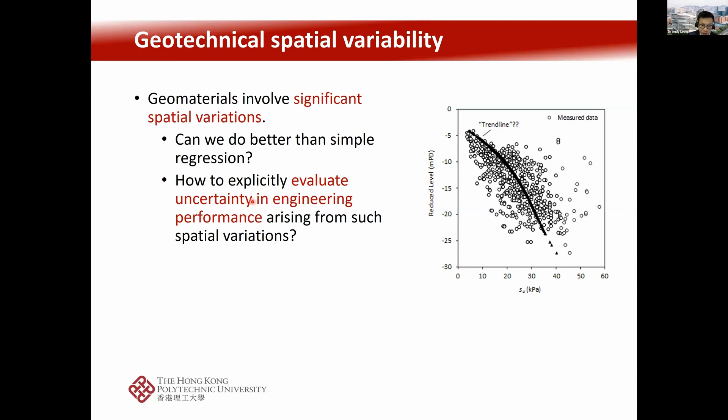So the question is, can we do something better? Can we use a more quantitative approach to consider all this variability and how that might affect our uncertainty in engineering performance? So here we go back to some basics in statistics. If you have a data set, it's very simple to calculate the mean value of those data points and also the standard deviation.

Two pages ago, we talked about this parameter called COV. COV in full is called coefficient of variation. It's basically just the standard deviation divided by the mean value. In other words, it tells us the amount of dispersion in the data set when compared with the mean value of the data set.

So if we go back two pages, for properties such as undrained shear strength, the COV, the dispersion, can be roughly 20 to 30% compared with the mean value of the shear strength. For friction angle, you can also have something like 10% to 20% COV, which again is just standard deviation divided by the mean value. So there's a lot of dispersion in geotechnical materials.

If you are familiar with structural materials, concrete and steel, for example, usually their properties might be associated with a COV of roughly 10% or less. Whereas for soil properties, this COV could be 20, 30, 40% quite easily, much, much more variable in geotechnical materials.

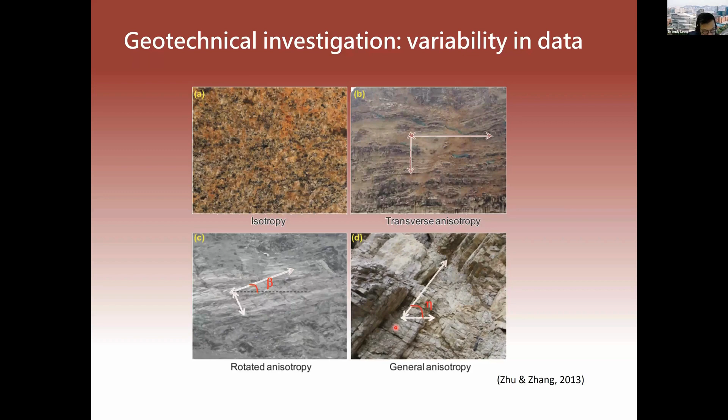So here are just some photos, to remind us again how variable geomaterials, soils and rocks, can be. You can easily tell that these materials are quite non-uniform, or heterogeneous, if you like. And in fact, over the years, the Geotechnical Engineering Office, or GEO of CEDD, has compiled a good amount of data from different parts of Hong Kong.

GEO, for example, manages a lot of slope projects across Hong Kong, and there are a good number of GI fieldwork reports and laboratory test reports. They have recently compiled all this into a digital platform, which they call the DGIU, Digital Geotechnical Information Unit, a web-based platform for engineers to easily extract data from different parts of our city.

And most of you already know that in Hong Kong, the level of geotechnical control is very good. When it comes to GI, drilling, coring samples, or obtaining block samples of the soil, we have a very good standard, GeoGuide 2 or GeoSpec 3, which tell engineers the best practice in retrieving soil samples and conducting laboratory tests on those samples.

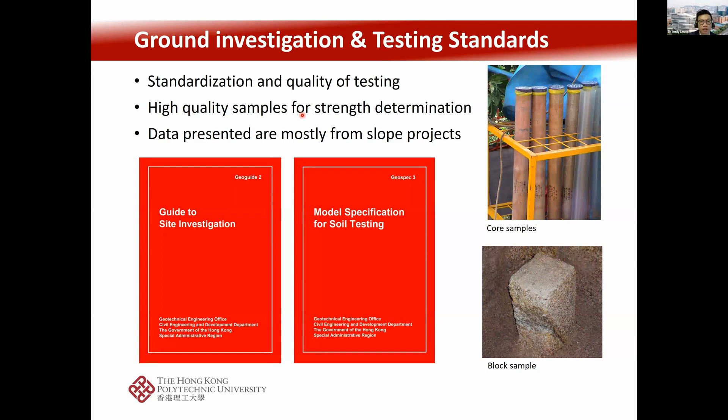So from all these data sets across Hong Kong, we have got high quality samples and also high quality laboratory test results to help us characterize the material properties, or more importantly, the variability of material properties across Hong Kong. So let's take a quick look at the distribution.

So this pie chart here basically tells us the number of data sets that GEO already compiled for different types of soils in Hong Kong. So we have a good database for fill material, a colluvium database with more than 800 data points, CDG 750, CDV 650, and so on. And these numbers here actually indicate the numbers of multi-stage consolidated undrained triaxial compression test data.

So when I say 750, that basically means we have got for CDG 750 combinations of cohesion and friction angle, which are based on the triaxial test results across different parts of Hong Kong. So today we probably will focus more on this CDG database because we've done some work using this quite comprehensive set of information.

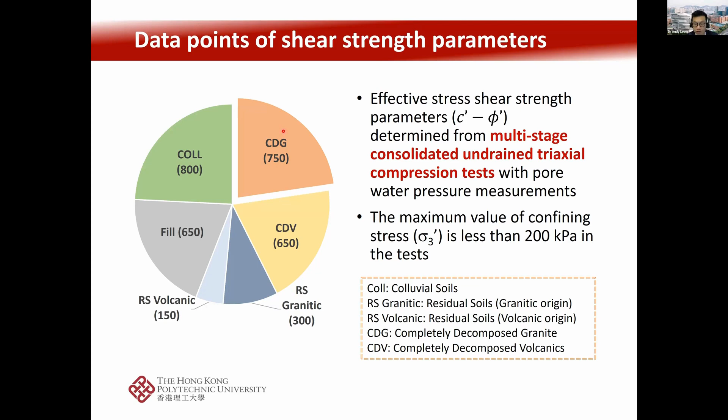Okay, so of course, if you have got 750 samples, c, phi, and so on, it becomes very straightforward for us to plot those data, calculate the mean value, standard deviation of cohesion and friction angle, and then figure out the coefficients of variation like we defined before. So just very quickly, for different soil types, the mean values of cohesion may vary from somewhere around 6 kPa to about 12 kPa. And then the standard deviation is roughly 60 to 80% of the mean. Again, that's the definition of COV.

And then similarly for friction angle, the mean values from these large data sets are also listed on this table. And sometimes we might notice that between the two parameters, cohesion and friction angle, there might be some sort of a weak correlation. So all these tables and data sets we published some years ago, like 2 years ago, in collaboration with colleagues in GEO. And of course, you can easily calculate mean and standard deviation from this data set.

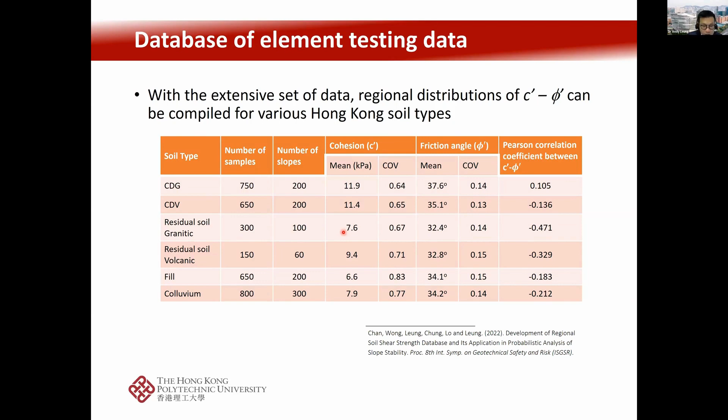You can also very easily plot this up into a histogram. So this one is a histogram of the cohesion values together with the fitted probability density function here. And then we can do a similar thing for friction angle, which looks like a normal distribution. These are the shear strength parameters for the colluvial soils in Hong Kong. And on the right-hand side, of course, you've got CDG.

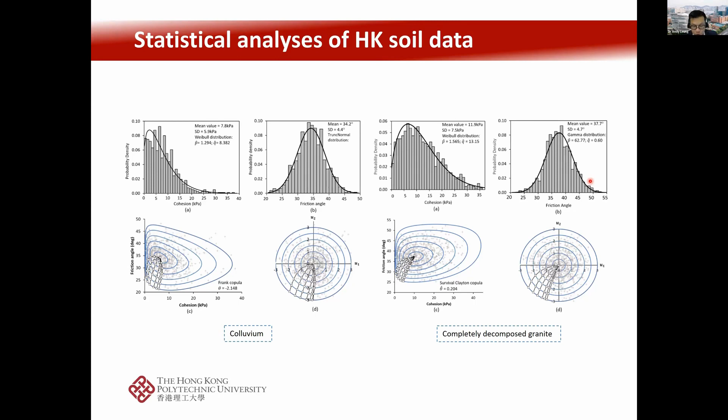Again, you can plot up the histogram and probability density function for the cohesion values and also friction angle based on these extensive sets of triaxial test data. So all these are actually quite straightforward. With these good data sets, it's very easy to do. But now we want to go one step further beyond just cohesion and friction angle.

If you think about the origin of these data sets, they were from slope projects where the main concern is to calculate whether the slope fails or not. It's a slope stability limit equilibrium calculation. So the most important things are, of course, the shear strength parameters, cohesion and friction angle.

But there are also a lot of geotechnical or civil engineering projects where the concern is not just failure or not, not just collapse or safe; the concern could also be the displacements of the ground. In that case, if you want the soil or rock displacement, you can't just rely on shear strength parameters. Everybody will know that at least you need some sort of stiffness, Young's modulus values, to help us calculate displacement.

So that's why we took those data sets, 700 and something sets of triaxial test data. We tried to go into more in-depth analysis to understand the entire stress path and also the stress-strain response, such that we can also determine the stiffness parameters, or more importantly, the probability distribution of the stiffness parameters. So we go into lots of the details of all those sets of multi-stage consolidated undrained triaxial tests.

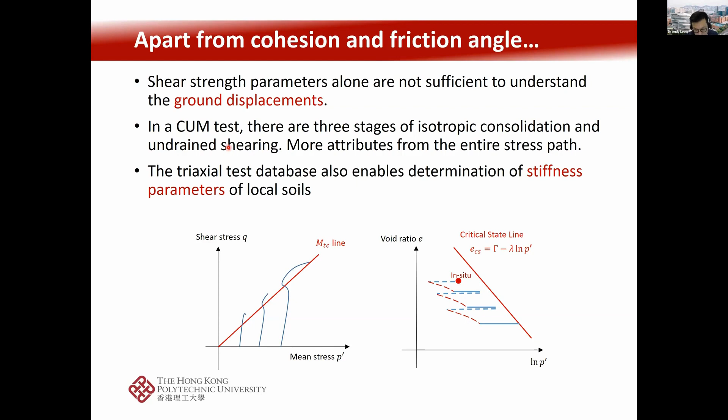And then we also try to look into how well we can simulate those test data using different constitutive models. So first of all, we start with a simple model, which is the familiar Mohr-Coulomb model. Most of you will still remember from school that in the Mohr-Coulomb model, you have the shear strength parameters, and then you also have some stiffness parameters, Young's modulus and Poisson's ratio.

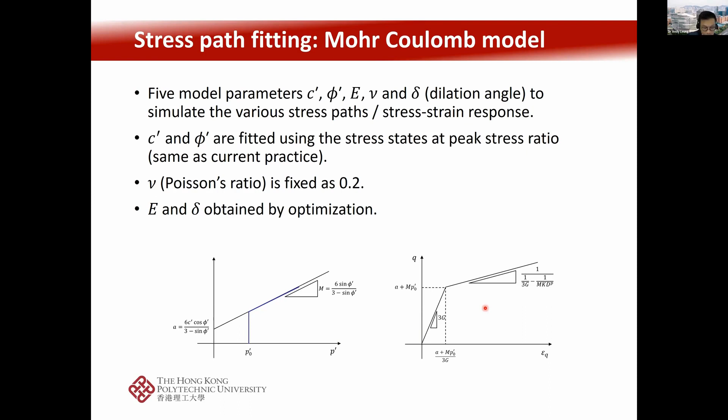So we try to see whether this particular model can match our experimental results well enough. And apart from this simple Mohr-Coulomb bilinear stress-strain model, we also introduced or adopted another more sophisticated model, which is based on critical state soil mechanics. So this model in particular is called the NorSand model, which was proposed by Dr. Jefferies in the UK in 1993.

So I'm not going to go into all these details of yield surfaces and the complicated details of the constitutive model. But then in simple words, this model allows us to understand or to simulate the more nonlinear behavior of the soil stress-strain response. So hopefully we're going to get something like this. We're going to use this model to help us simulate a very highly nonlinear soil behavior. So that's what we want to achieve using this slightly more complicated constitutive model.

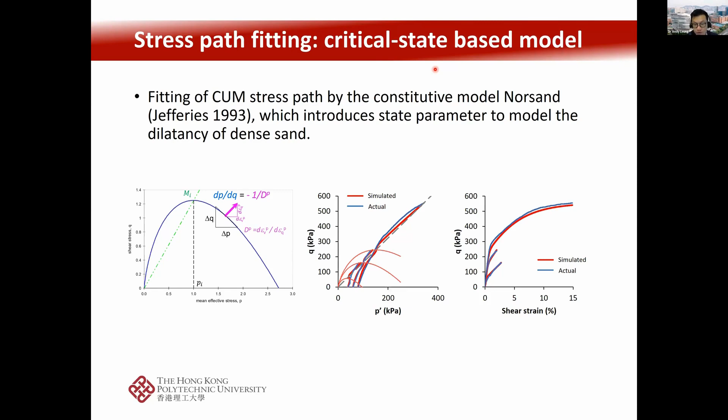So for those of you who might not be very familiar with critical state models, basically this NorSand model includes these model parameters. So if we go back to Mohr-Coulomb, we know that there are basically 4 or 5 parameters: the shear strength parameters and the stiffness parameters. When it comes to the critical state model, NorSand, we have in total 7 parameters. Some of them are related to the shear strength. Some of them are related to the elastic modulus. Some of them are related to the yield behavior, the yield function, yield surface, and so on.

So I'm not going to go into too much detail in terms of these theories. But then the main message here is that we have got a lot of triaxial test data. We want to be able to simulate or calibrate the parameters so that we can predict the entire stress path and also the entire stress-strain response of the realistic soil behavior.

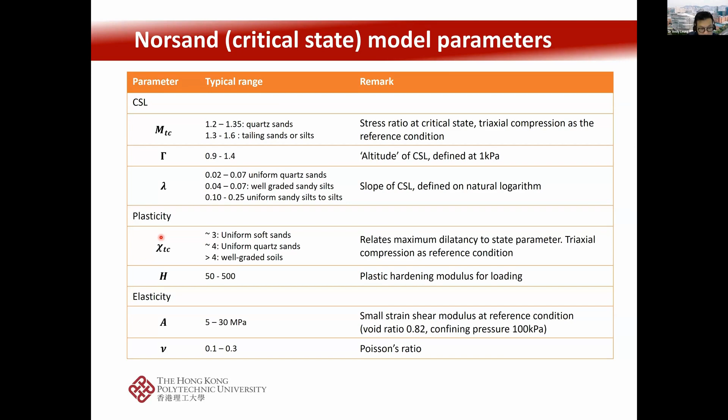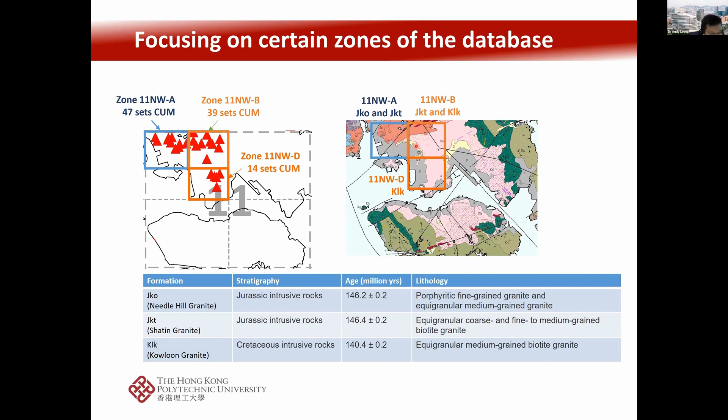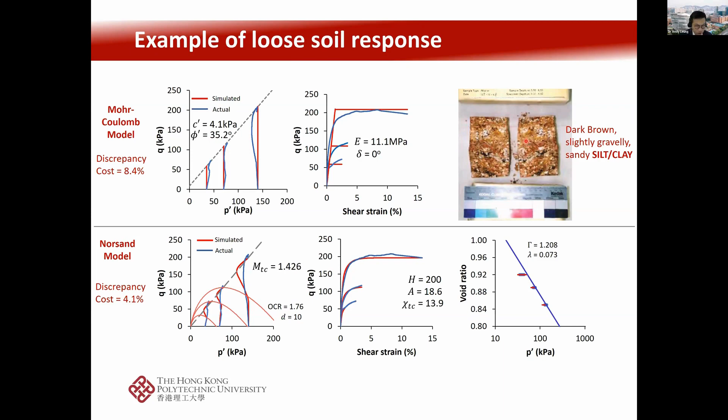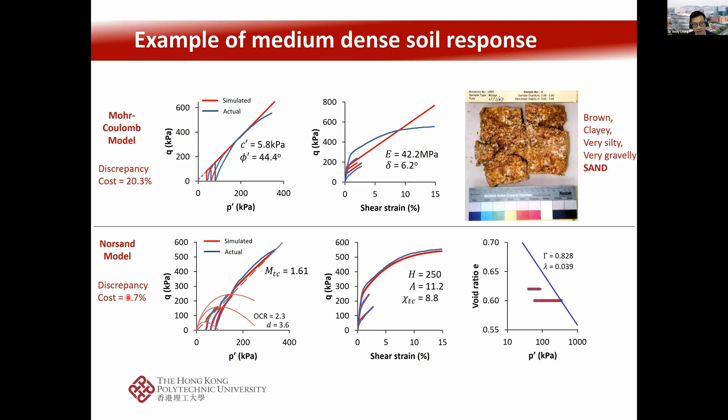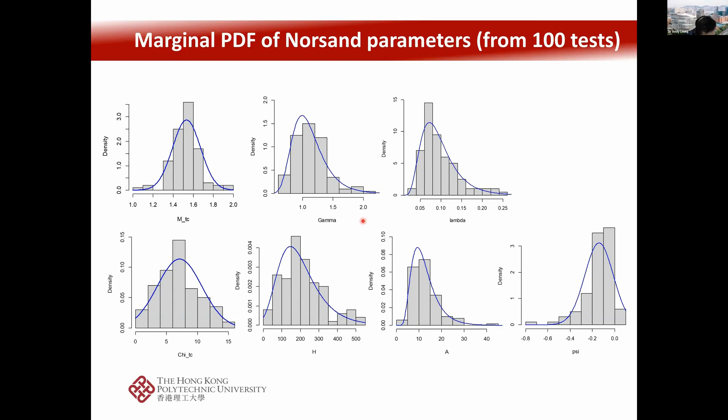And then with that, I'd like to go to the second part of today's presentation, which is how this material variability or material uncertainty will be reflected into the response of the system. So basically, if you have a certain uncertainty in your material property, if you put that uncertainty into your calculation model, which might be your finite elements, finite difference, or other types of calculation model, you will then get to understand or obtain a certain uncertainty in your system response.

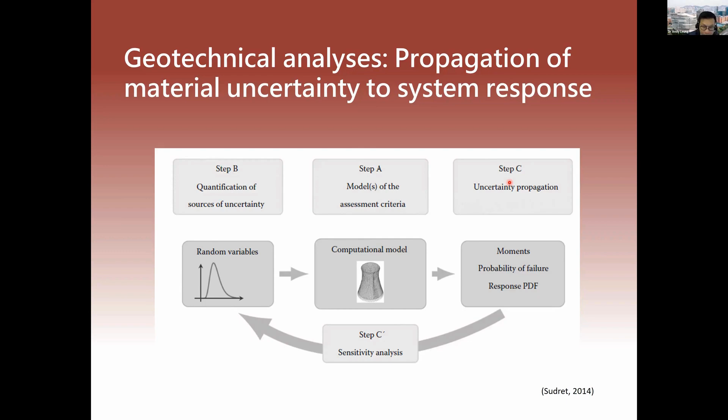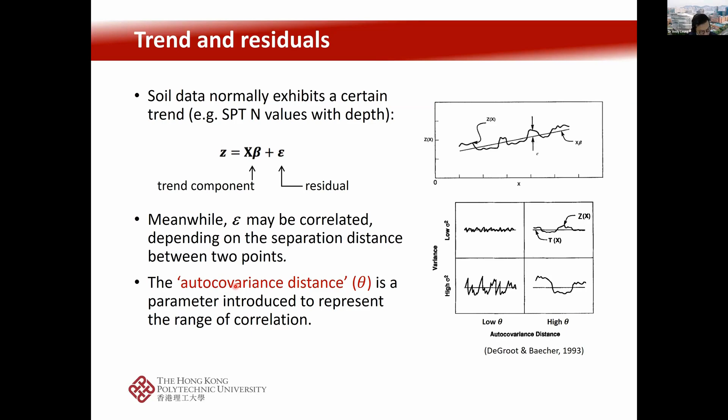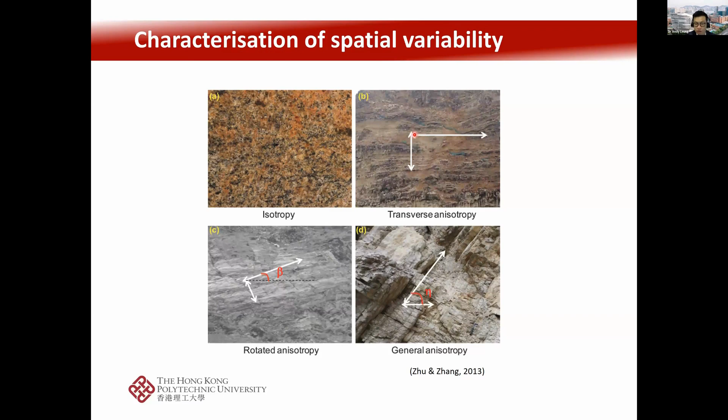And then from the previous page, we saw that the pattern can be different along different directions, which also means that the theta value can be different along different directions. And then if we put that into a mathematical sense, we can try to model the variability or correlation of soil properties in three directions with different theta values. And figuratively, we can have larger theta values along the horizontal direction, theta 1 and theta 2, and then relatively smaller theta value in the vertical direction, which I put as theta 3 in this diagram.

And then if you can have different values along the different principal directions, then mathematically you can figure out what happens in theta along all other orientations, which is basically what we're trying to represent in this ellipsoid in the three-dimensional space. But if we try to put that in more simple terms, what that means is if you have theta values or the combination of theta values like this, it will be reflected into variation of soil properties like in this contour. So this red, green, and blue contour basically is indicating the variations of soil property, which might be the stiffness or the friction angle, etc.

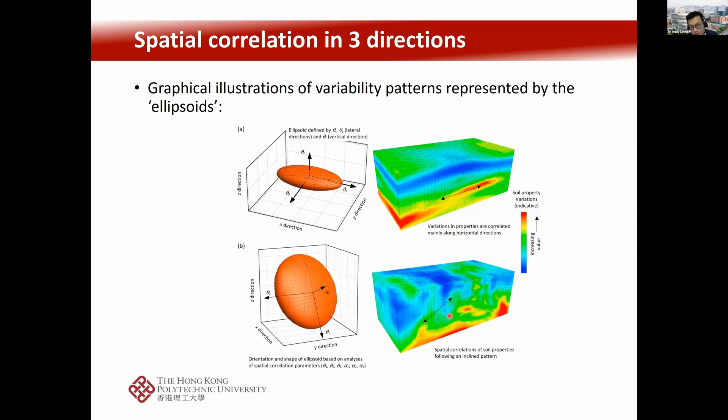And then more importantly, we can put all these into geotechnical scenarios, making use of the technique called random field modeling. So on the left-hand side, here we try to model layered soil with different properties with depth. And then we try to understand in this situation, how does the shallow footing respond in terms of the footing displacement or bearing capacity. So we can make use of the idea of Monte Carlo simulation to generate many different possible soil profiles that satisfy the specific features of theta that we define. So this is trying to understand the footing response on top of spatially variable soils.

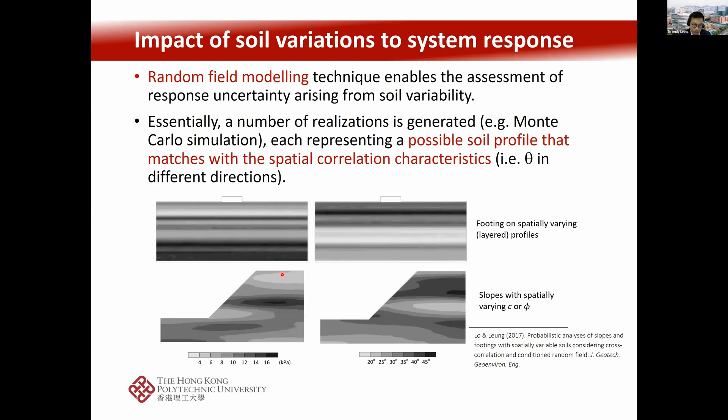And then on the bottom, we're trying to understand how this variability of shear strength parameters is going to affect slope stability in different situations. And then there could be many other different things that we can do with these mathematical skills. So we can try to see if you have a soil profile which is varying in three-dimensional space, how that is going to affect your deep excavation project in terms of your strut force or retaining wall deformation and so on.

We can also try to understand how the variability of soil properties will affect slope failure. Because generally, if you just take a two-dimensional slope analysis, you're basically saying that along the longitudinal direction, you have a plane strain problem where if the slope fails, the entire slope will fail altogether in the longitudinal direction. But if we consider the variability of soil properties carefully, we can observe that generally there might be weak spots along your slope that fail instead of the entire embankment coming down altogether. So these are all different models that we can construct to try to understand how soil variability affects the system response.

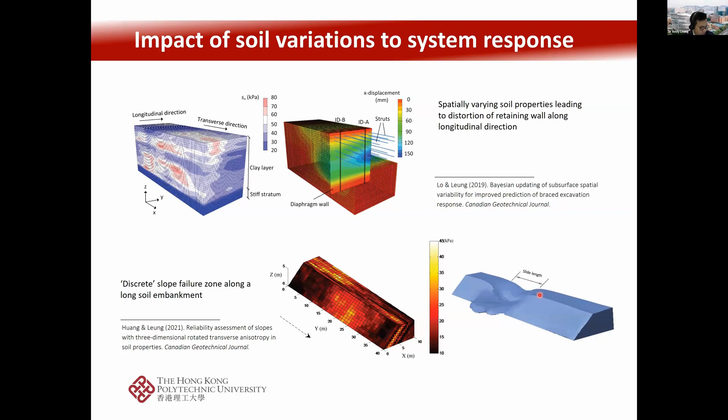But here I want to spend a little bit more time to talk about two specific cases. The first one is a deep foundation case in Germany. So this tower, I can't speak German. So this tower here was constructed in 1993, 208 meters tall, supported by a piled raft with 40 friction piles. So quite unlike Hong Kong, in Frankfurt, the bedrock level is very deep down. So many of the piles were actually friction piles that are embedded in Frankfurt clay.

So there have been quite extensive reports of the foundation response analysis, and it was also observed that there is a tilting of the tower or tilting of the foundation with an amount of about 1/1600.

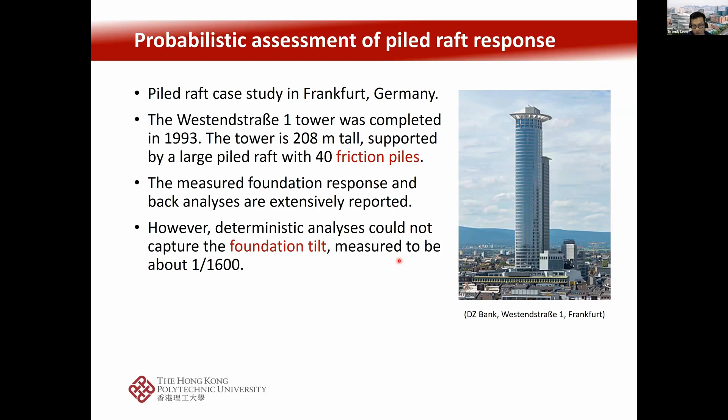So basically, if you carry out deterministic analysis, considering uniform soil properties or uniform layering of the soils underneath the tower, you really can't obtain a tilting in your foundation if you talk about uniform horizontal layers of soil underneath the foundation. So we try to see whether we can develop a probabilistic approach to understand this problem.

So again, I'm not going into details of the analytical approach of how to calculate the foundation response and so on. But essentially, the main point here is that we incorporate the subsurface soil profile and we try to model the variation of the soil stiffness and soil strength underneath the foundation. And at the same time, we also take into account the foundation problem, the pile raft with 40 piles supporting the superstructure 208 meters tall.

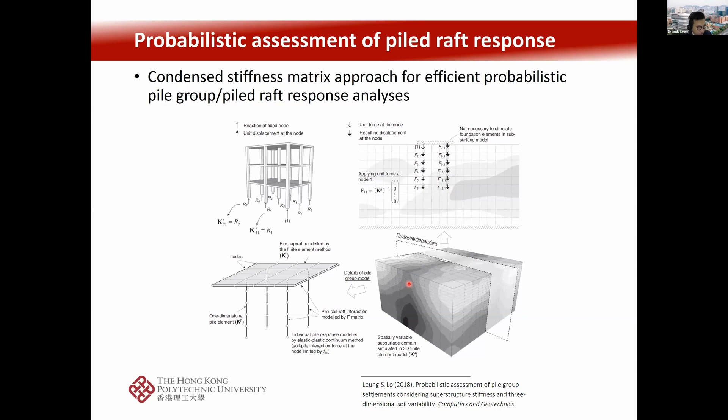So we try to see whether this variability in soil properties will give us the tilting response of the tower. Because we can model different soil properties varying underneath the foundation, we can get the probability density functions of the foundation settlements at the center, the maximum and minimum pile forces that were measured by the engineers there. And also, we were able to estimate the amount of tilting that might happen in the foundation due to the variability of soil properties underneath.

And here, of course, the gray ones are the PDF, the probability density. And the black line here is the actual measured value in Germany. The one I would like to highlight is this figure B on the right-hand side. We were able to estimate the foundation tilting, which generally matched with the measured tilting response reasonably well. So we're quite happy to say that considering the variability of soil properties, we might be able to explain why the foundation tilted after the tower was constructed.

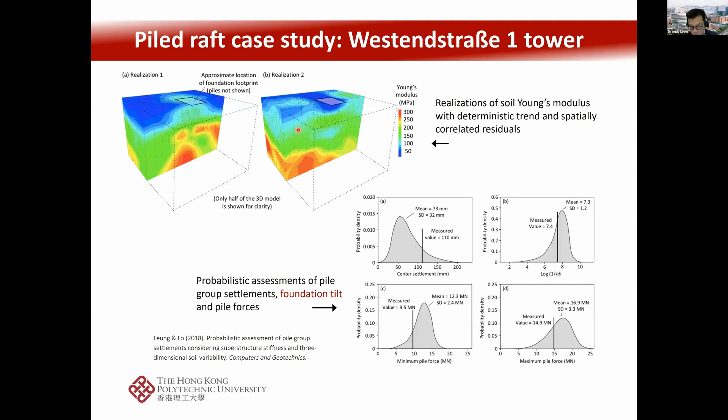The second case that I want to spend a little bit more time on is a landslide case back here in Hong Kong. Many of you will have heard about this Ching Cheung Road landslide that happened in 1997 after a heavy rainstorm during a typhoon event. At that site, there were some GI, drilling and laboratory testing, and there were 25 sets of site-specific triaxial test data at this Ching Cheung Road slope site.

So in this case, you might ask yourself, now you have got 25 sets of triaxial test data, what would you do to try to understand the slope stability? Of course, the conventional way will be taking the 25 sets of test data, trying to obtain the so-called moderately conservative combination of cohesion and friction angle, putting that into SLOPE/W or slope stability analysis software, and calculating a single factor of safety.

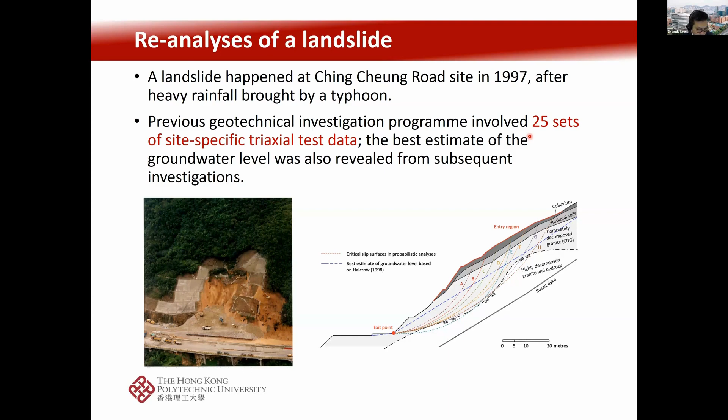But we want to try to do that in a probabilistic manner, to understand the mean estimates of factor of safety, or calculate the probability of the slope failing, considering these test results. And there are actually three possible options we can consider. One is to say, like I said earlier, we know in Hong Kong there are already 750 sets of data points of c-phi based on previous projects across the entire city of Hong Kong.

That's method one. Option two is to say, now we have got 25 sets of triaxial test data at the Ching Cheung Road site. We try to fit a histogram or probability density based on the 25 sets of data, and then again estimate the PDF of factor of safety. And method three is to say, can we not combine our previous knowledge or regional data and supplement it with the site-specific data to get the best of both worlds? That's what we call a hybridization approach. So we're trying to see how these three approaches will give us different insights.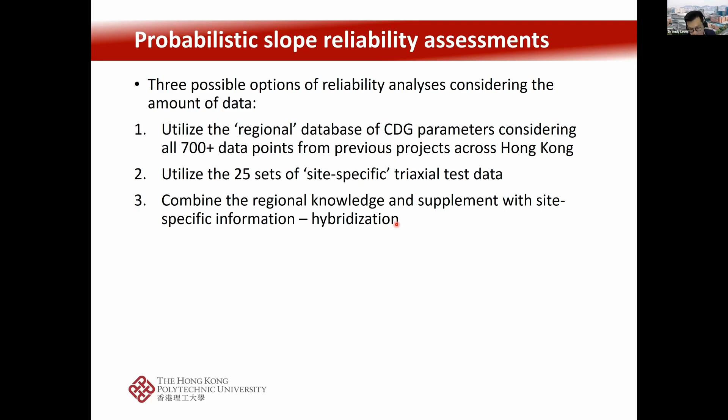But if you have a case where you have a lot of site data, you will combine your site data with the regional previous knowledge to combine it into a so-called hybrid PDF, which will be heavily influenced by your site-specific knowledge if you have plenty of site-specific knowledge. So that's the idea of hybridization.

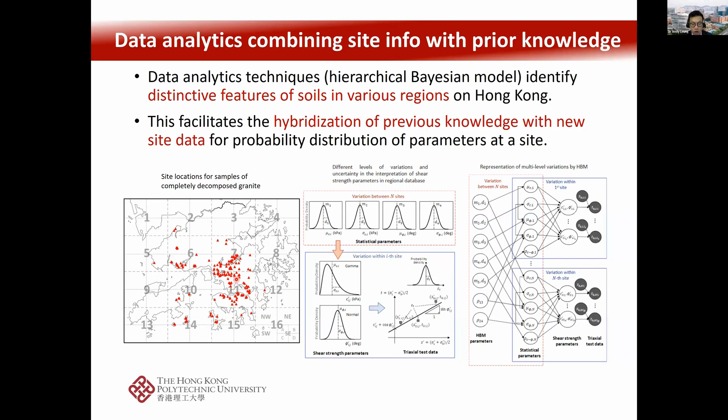And then we make use of these similar concepts, take into account the range of 750 datasets across the entire Hong Kong, try to do some sort of a smart analysis. And then we propose an approach called hierarchical Bayesian model, basically to combine the city-wide data across Hong Kong with the site-specific data around Ching Cheung Road with the 25 sets of data. And we try to see how different they would look like.

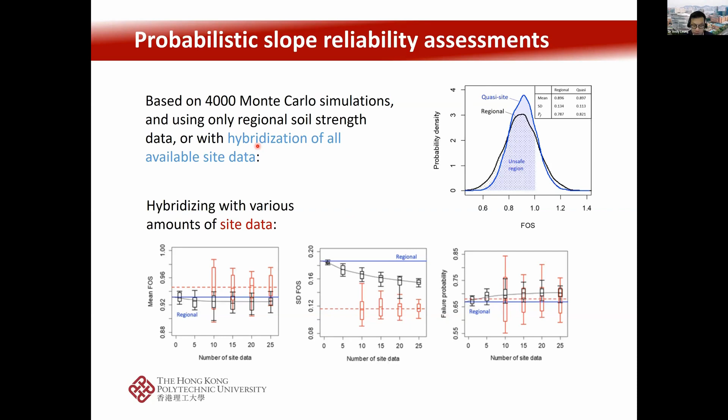So coming to the very last part of the presentation, previously we've talked about how we can analyze the existing database of triaxial tests. We also briefly touched upon this Bayesian approach to help us combine previous knowledge with new data. And the final part here, we're going to talk about new ways to help us measure or generate data based on the measurements of infrastructure response.

So I'm going to be quite quick in the final parts because some years ago I gave a similar presentation in the Geotechnical division of Hong Kong IE. I don't want to repeat too much of that here. But then for the benefits of those who may not be Geotechnical division members, here in PolyU, currently we are doing a lot of work in terms of infrastructure monitoring using fiber optics technology.

So in simple words, in the conventional way, if we want to measure the strain inside your infrastructure, your pile, retaining wall, columns, and so on, quite likely you'll use a strain gauge. And then strain gauge will give us point-wise measurements. In other words, where you place the strain gauge, you only get data at that location of the strain gauge. So the other technology is called the distributed fiber optic sensing technology.

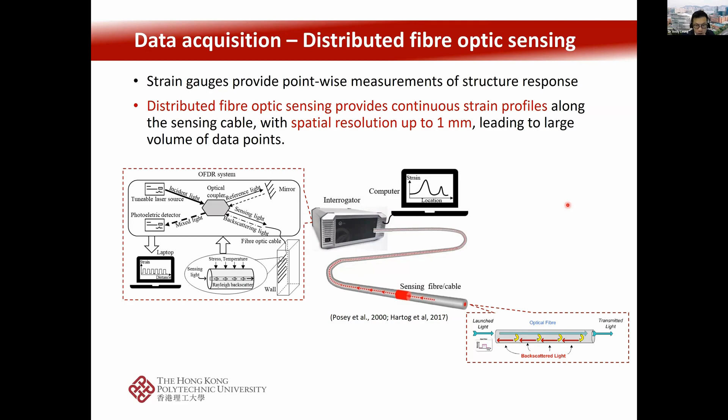In other words, we're trying to measure the compression along the lateral direction of the retaining wall panel. It's very difficult to do that using strain gauges, so that's why we use this fiber optic technology.

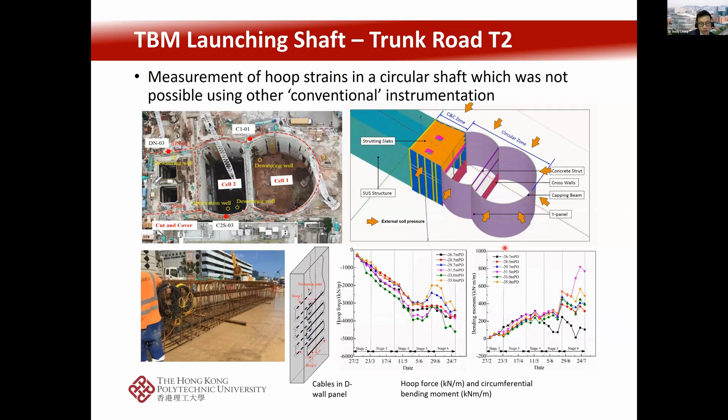The cables that we use in this project look somewhat like this. In reality, these cables are about 5 millimeters in diameter, just like any electrical cable. But inside, we've got the fiber optic core surrounded by this steel armor. So these are quite strong and can survive the environments of a construction site. Most of these cables actually survive and give us pretty good readings.

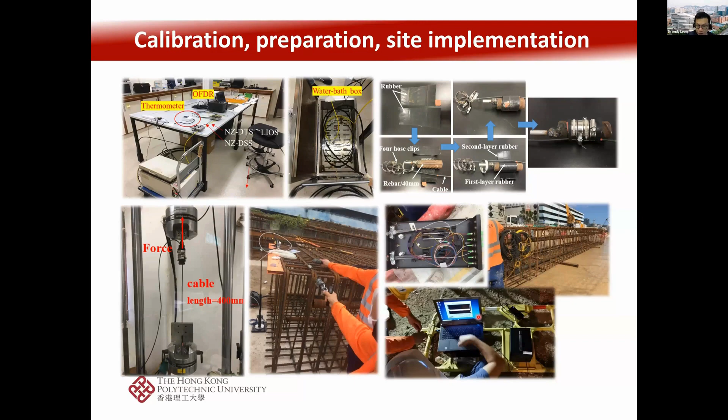The next page just shows some of the preparatory work that we did in our laboratory, some calibration work before we bring the instruments to the site. And this photo here shows the process when we're obtaining the data of the strains inside the fiber optic cables. And then this page shows how the data looks.

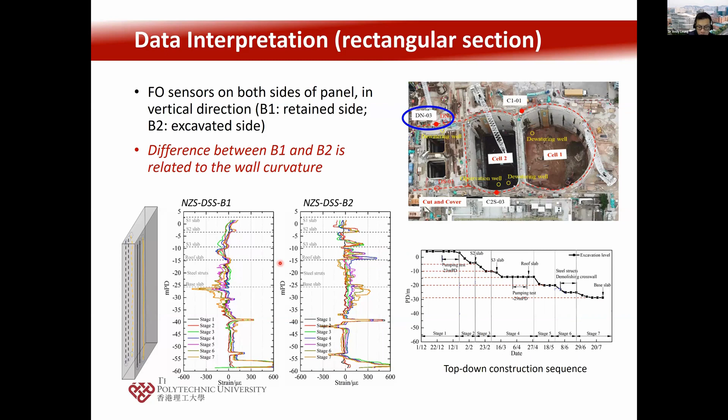Using these differences between the strains in the front side and the back side, we'll be able to calculate the curvature and therefore the bending moments. Stage 1, the curvature is represented by the black line here. And then stage 2, a top-down construction, so we have a slab at the top and some excavation, and this curvature in red is captured by the fiber optic readings in red.

Stage 3, more excavation, the green profile of the incremental curvature is also captured by the green profile of the fiber optic measurements. Similarly, we go down deeper, stage 4, stage 5, 6, 7, the curvature in different colors is also captured by the readings of the fiber optic cables.

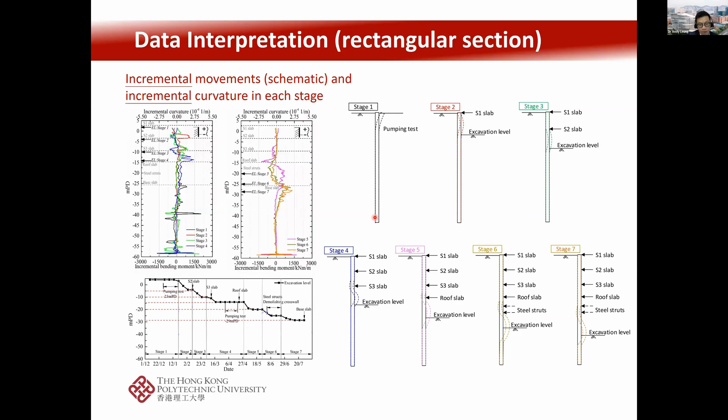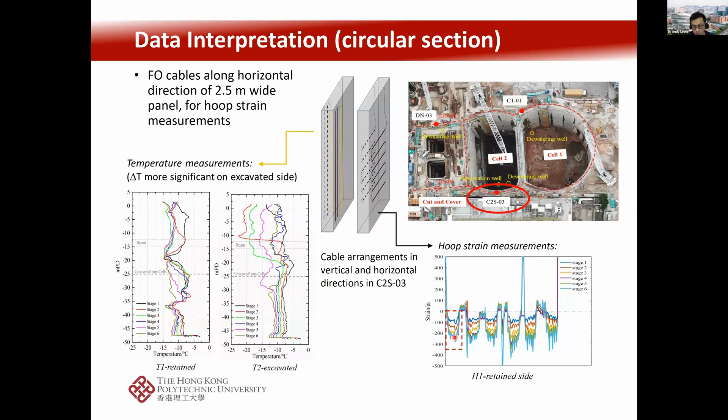We have cables arranged on the front side and also cables arranged on the back side of the retaining wall, and they actually capture different magnitudes of the compressive strain. The front side here, a bigger compression, and the back side here, a smaller compression at different construction stages.

If we take a moment to think about why this happens, it's basically because, just now we said that if you have bending of the wall in the vertical direction, you have different strains in the front side and the back side. And if you have bending in the horizontal direction of the wall, you will also have a difference in the compressive strains comparing front side and back side.

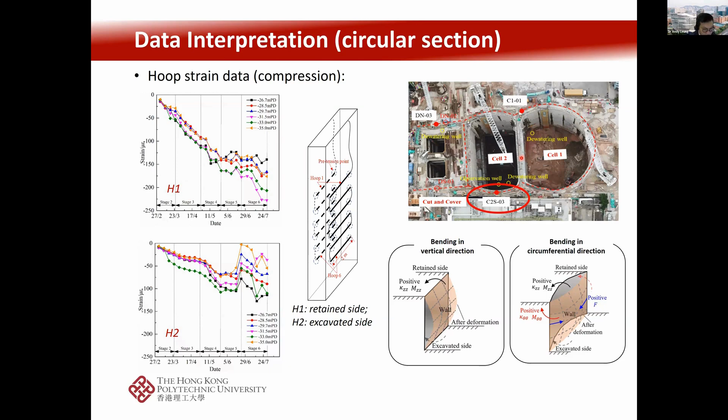By doing these measurements, we're actually able to capture the bending of the wall along the circumferential direction when you have a circular cofferdam utilizing the hoop action to support the excavation. This is quite interesting behavior that we captured, and we published that in a recent journal article.

The main message here is that by using these new instrumentation methods, we were able to have a new way to generate large amounts of data to understand our infrastructure behavior, which we wouldn't have been able to do before.

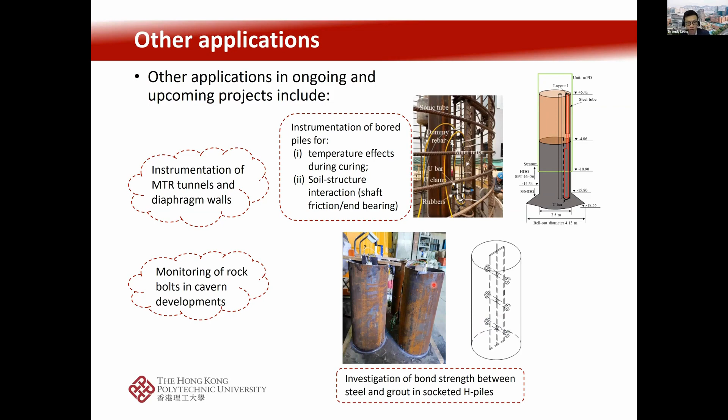And then after that project, we are also trying to apply this fiber optics technology in many different types of infrastructure or geotechnical engineering projects. We are considering to do that in some MTR projects. Well, we are still in discussion for that. But then we are also currently doing this in certain bored pile projects, also some tunnel and cavern developments, and also some laboratory developments to try to review different aspects of soil structure interaction in different scenarios.

So coming to the summary, this is the last page of the presentation. So here in this presentation, we talked about new ways to interpret data sets of conventional triaxial tests or geotechnical element testing. We also discussed new ways to analyze data with some Bayesian machine learning for decision making to understand how variability of soils will change our perception of the risk of the project.

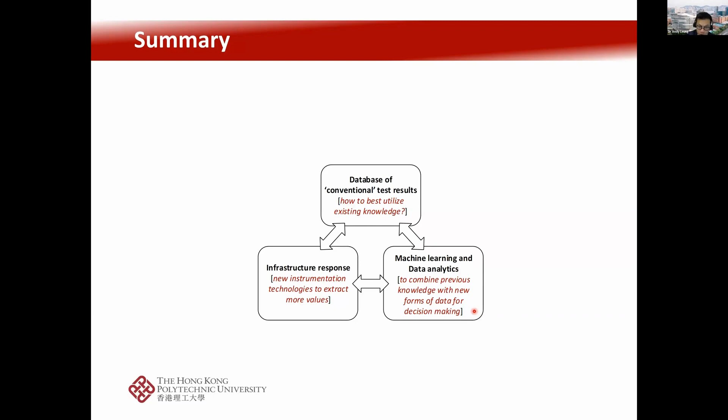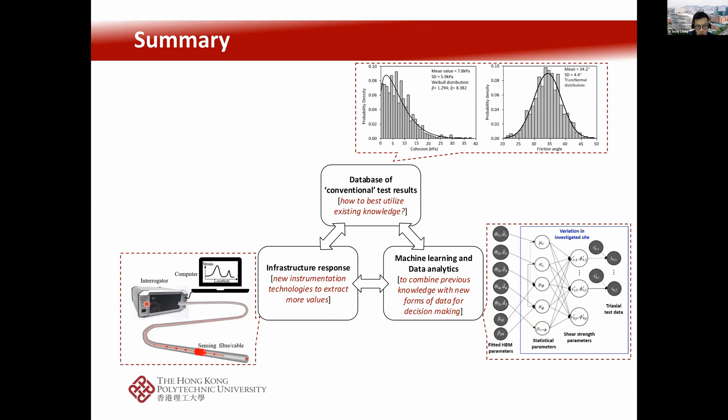And we also discussed some new ways to help us generate new types of data when it comes to understanding infrastructure behavior. And all these are actually somewhat related to each other. So we want good data sets to give us good analytics results. And then we also need these data analytics tools to combine with different sources or new sources of information to give us better risk-informed decision making.

And then ultimately, we also want these new data sets or new types of data source to give us a better understanding on various aspects of soil structure interaction so that our knowledge or experience in soil variability and soil properties can be properly reflected into how we understand infrastructure behavior.